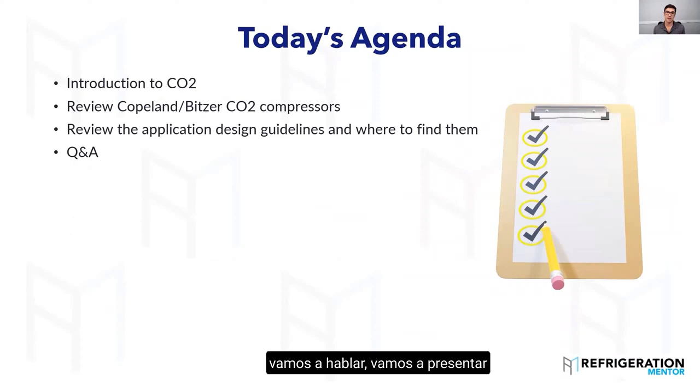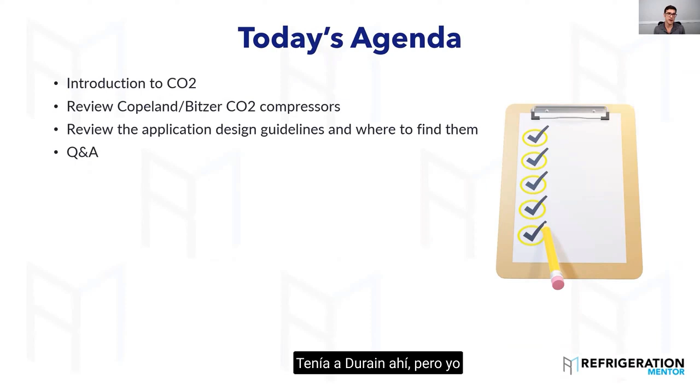Today's agenda: we're going to introduce CO2, talk about some key features of it, and then get into reviewing some Copeland and Bitzer CO2 compressors. I did have Dorin on there, but I don't know if we'll have enough time. If we do, we'll get into a little bit of those.

Have many of you worked on CO2? Just by a show of hands, or shoot it in the chat.

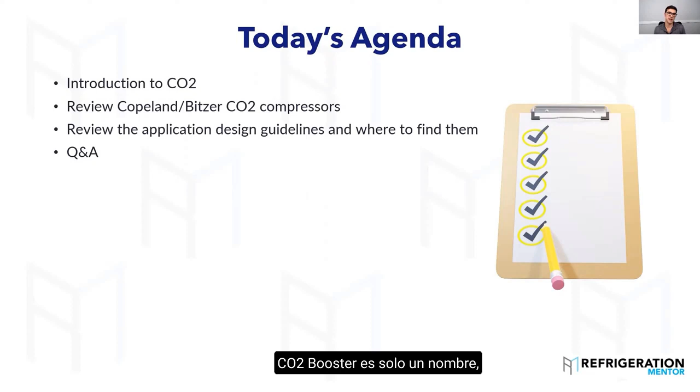I see a question here already. Toyin asks, what's the difference between CO2 booster and CO2 with ejectors? So CO2 booster is just a standard system, you wouldn't have ejectors or parallel compression. We won't dive into that today, but it is a difference. CO2 booster is just a name meaning transcritical system. But if you have a basic system, you wouldn't have ejectors, or parallel compression, or adiabatic cooling.

Okay, great, Paul. Yes, so Pat has, Jared has. Dean, a little bit about this, thanks for the question.

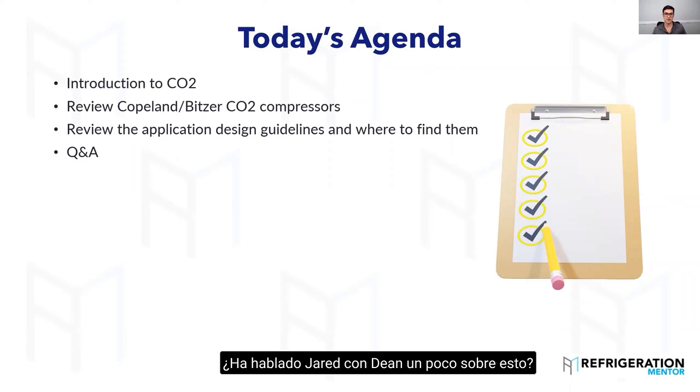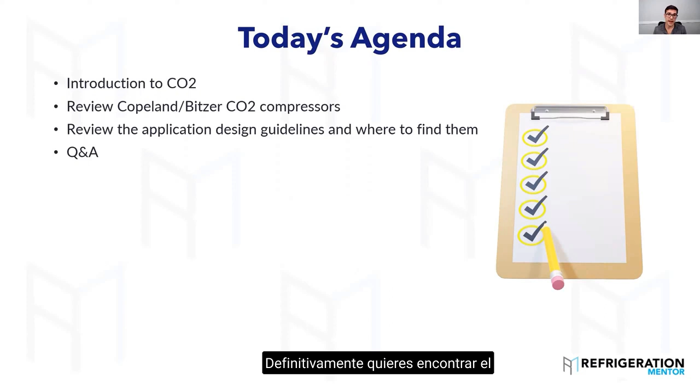So then we're going to review some of the application designs. And what I mean by that is I'm going to show you where to find the information quickly, because I think that's the most important thing. In my years working at a manufacturer, I really honed my skills in finding the answer quickly. As technicians in the field, that's what you want to do, find the answer as quick as possible. When you can do that, it helps you build confidence in what you're doing and find the answer quicker so you can resolve that problem for your customers.

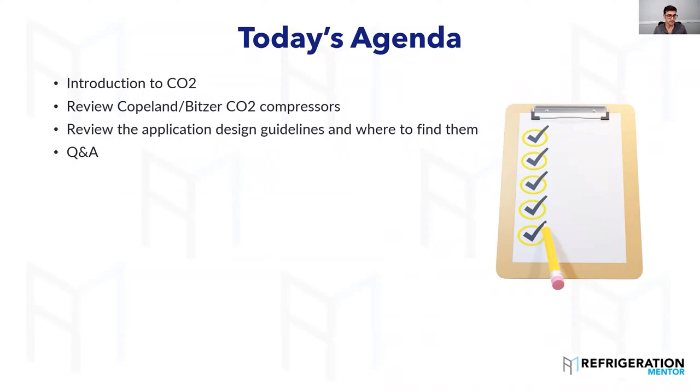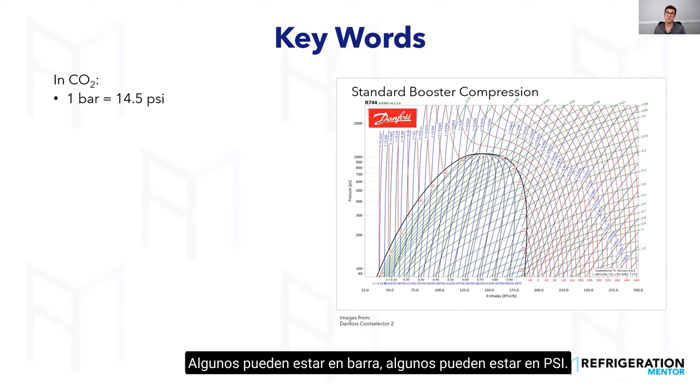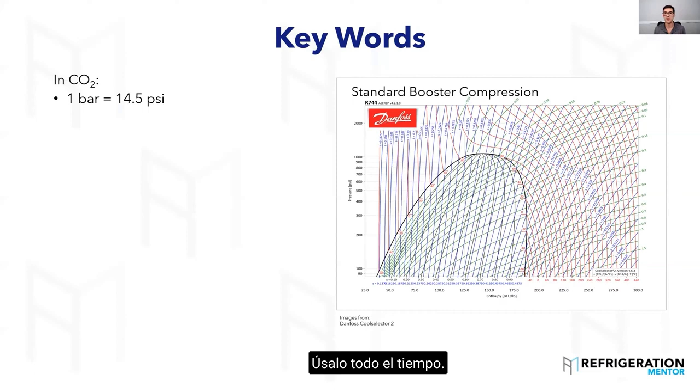So CO2, some key facts: 1 bar equals 14.5 psi. With CO2, you're going to start seeing, here in North America we talk in refrigeration terms of Fahrenheit and PSI, because in Canada it's a little bit different. In Europe, in Australia, where I worked, you're talking bar and Celsius. So you need to understand conversions, doesn't matter where you're at in the world, because now you're getting equipment from everywhere. Some may be in bar, some may be in PSI. You just really want to understand that. I highly recommend downloading an app on your phone that is a converter, for temperature and pressure conversion. I use it all the time. I'm getting a little bit better, but you need to understand conversions.

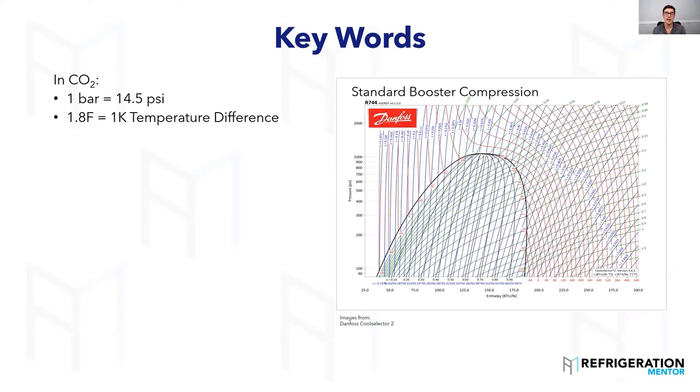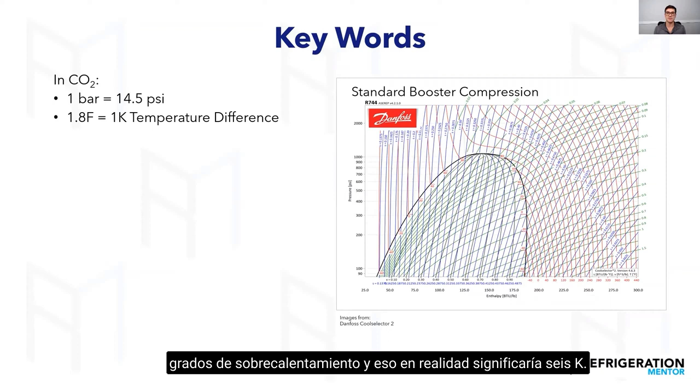Next thing, temperature difference, you're going to see a lot, especially in CO2. We talk for superheat, for example, or subcooling, here in North America we'll say 10 degrees superheat, and that would actually mean 6K. So that's the temperature difference when you're talking Kelvin. We use Fahrenheit, just once again understanding these conversions because you're going to see them in CO2.

Okay, critical point. What's the critical point? Does anyone know? You can unmute yourself and tell me, or put it in the chat. Isn't it just above 1,000?

Yeah, close. There is a critical temperature and a critical pressure. Does anyone know where it is on this graph? Thank you, Jared. At the top of the curve, isn't it the point where it doesn't change state anymore? Exactly, right here - this is the critical point.

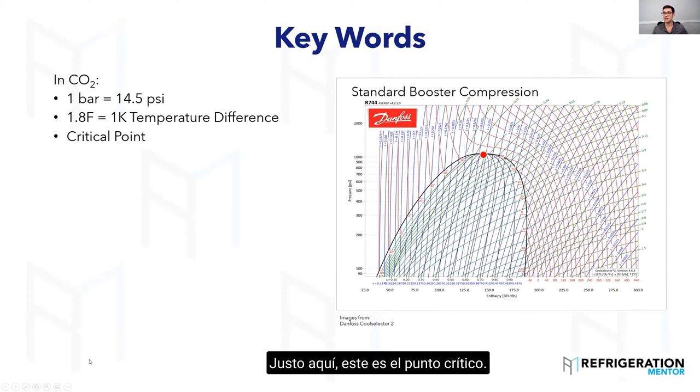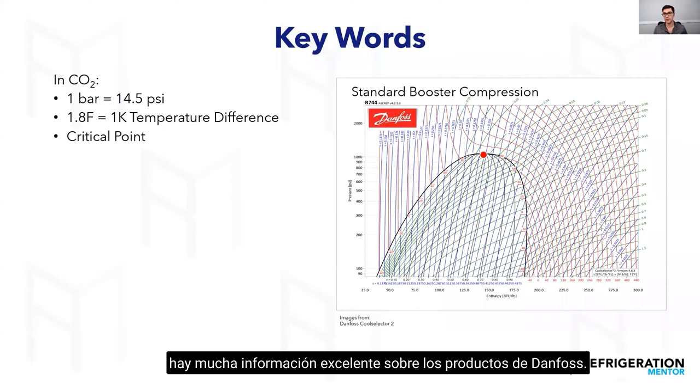So on this right hand, this is from Danfoss Coolselector 2. If you don't have this software, I highly recommend downloading it. It takes a little bit to learn, but there's so much great information in there on Danfoss products. Right at the top of the curve, that's the critical point. Every refrigerant has a critical point.

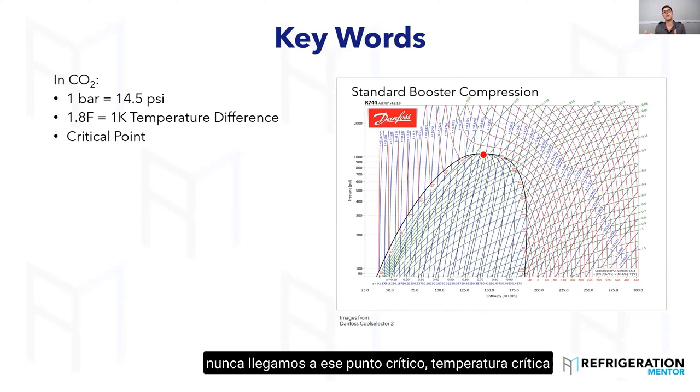We just don't see it with HFCs or HFOs or CFCs back in the day, because we never got to that critical point - critical temperature or critical pressure - because it was so high. But now with CO2, it has a really low critical point, and you'll see it at 87.8 Fahrenheit or 31 degrees Celsius.

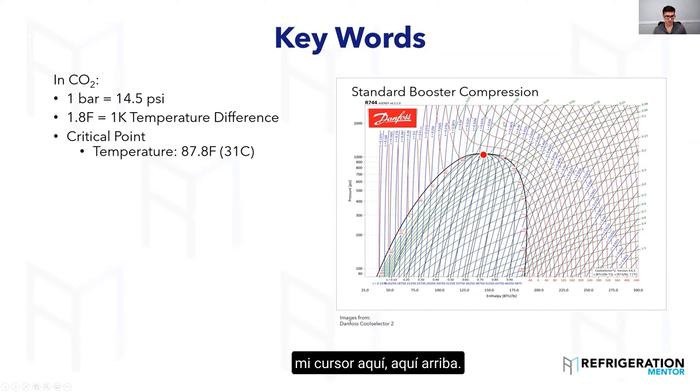So when you're above that, you're in what we call our transcritical or supercritical zone. And that would be, if you can see my cursor right here, right up here. So when you're up here, that means you're in transcritical mode or you're in that supercritical fluid zone. So it's not really a liquid, it's not a vapor, it's like a fluid.

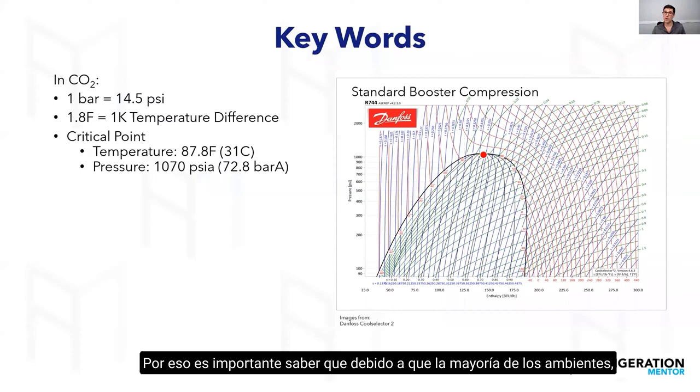I've seen it many, many times. One of the trainers I used to work at, you could put it into transcritical and you could see that phase - you can change it from liquid to vapor to that transcritical. So it's important to know that because most ambients, most climates will get above that.

Because CO2 was mainly in the regions where it's cooler out - like Canada was a great spot, anywhere north of the equator. When you start getting closer to the equator, it gets a lot warmer, so it was a lot harder to have CO2. CO2 is not new - CO2 has been out for over 100 years in refrigeration.

But newer synthetic refrigerants were easy to use, lower pressure, and then we went through a cycle of having synthetic refrigerants. Now we're back in natural refrigerants. You're going to start seeing them heavy. Regulations are pushing CO2 or natural refrigerants.

You're going to see more CO2, more propane, low GWP refrigerants - which I mean by that is global warming potential refrigerants, like A2Ls, which are mildly flammable refrigerants. If you have not seen them already, you're going to start.

But there's going to be a massive influx of CO2 equipment in the next 10 years. There's already a lot, especially here in North America and around the world, you're going to see a lot more. Japan has tens of thousands of CO2 units, like heat pumps, water heaters, for example. There's over 30,000, I believe probably over 30,000 supermarkets.

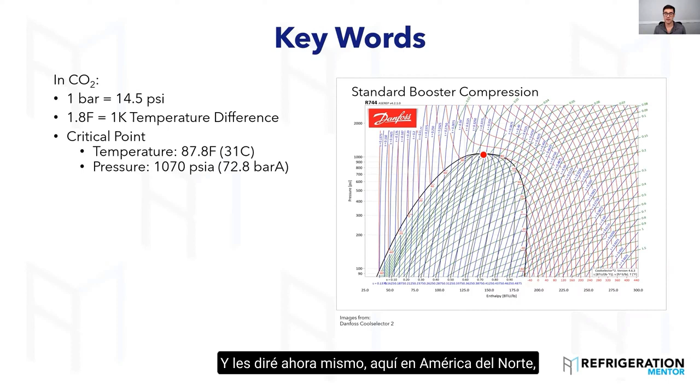But it's good to understand where it's going. And I'll tell you right now, here in North America, at some point, it's going to be all supermarkets going to natural refrigerant. In Quebec, one province here in Canada, it's anything over 50 kilowatts, which is 67 horsepower, which is not a big rack, needs to be below 150 GWP, and that's pretty much CO2.

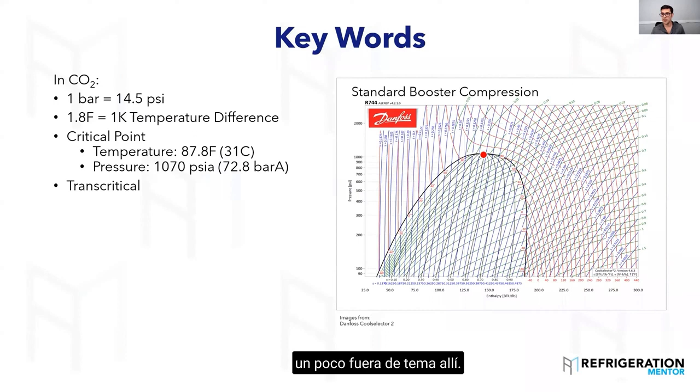California's got a lot of regulations - they got an alliance there, so you need to understand this. A little bit off topic there. So transcritical is anywhere above that critical point - we talked about that critical point. So anything above here, when we get up here, is the transcritical zone.

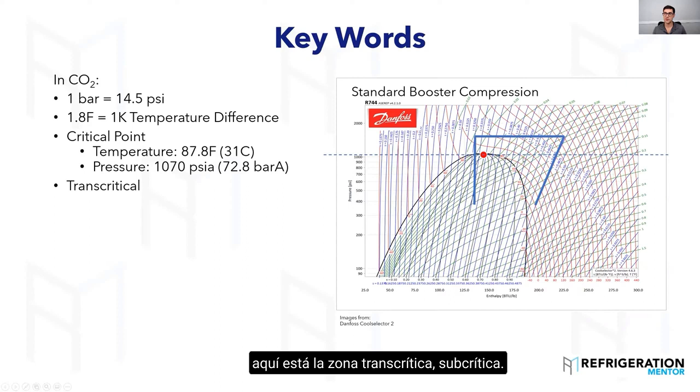Subcritical - that's where all our refrigeration equipment works now. So if you work on 404, 448, 449, 134A, we're always running in the subcritical zone because that critical point's so high. It's really important when you talk about a booster system - you're going to have the medium temp, which will go into transcritical, and then you have your low temp, which is going to stay in subcritical - so that's your freezers. Any questions so far?

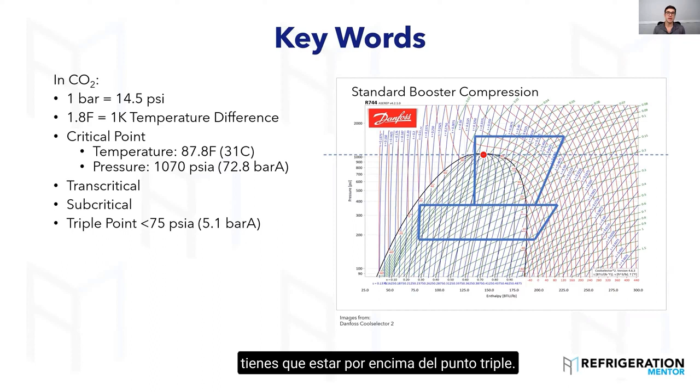Okay, triple point. The triple point is something very important to know, because when you're charging any CO2 system, you need to be above the triple point. If you try to charge a system below the triple point, what could happen? Anyone? Dry ice. Dry ice, exactly.

I've tried, to be honest, on demos and trainers. I pulled things into a vacuum and blasted liquid in there, but I don't think I did it right. Maybe because it was 1/4 inch lines and it was flashing. I couldn't cause dry ice, but I've seen times when I was pumping down a circuit and wanted to make dry ice, and I pulled off. You've got to be safe with CO2, wear gloves, glasses, be very safe.

I pulled it off while I knew there was still liquid to make dry ice, but I had to try to do that. I know it does happen, but I've talked with hundreds of contractors who've been working on systems, and they haven't come across making dry ice, even though I've seen it and heard about it. Taking the liquid dryer shell apart, you can usually make it pretty quick. I've seen it done there many times when you're changing the filters.

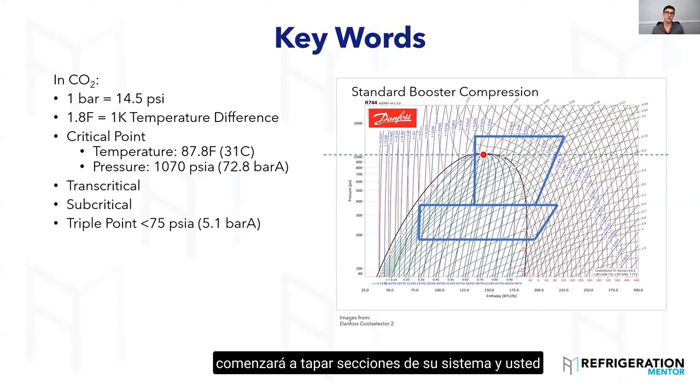So you need to be aware of that, because when you're pumping down a system and changing that core, you're making that really cold. And if you get dry ice in there, it sublimates, so it's going to take a while. The best thing is to probably close it up, raise the pressure, turn it to liquid, and get rid of it. But you're going to want to clean that out, and then pull a good vacuum after that. You don't want dry ice in your system, because it'll start plugging up sections of your system. You can run into major issues, especially if you cause some dry ice, and then think the coil's evacuated, and run into non-condensables in your system.

So here's the triple point region. It's good to understand where that's at. You just don't want to get into a dry ice situation. If you've ever seen dry ice before, it's just a little block, really cold, minus 109 Fahrenheit, I believe. And when you get that in the system, you're going to run into a world of hurt.

Trapped liquid. This is really bad. You do not want to do this. At 68 degrees or 20 degrees Celsius, you're looking at like 868 PSI pressure in a cylinder. If you all of a sudden bring that temperature up by 1 degree Celsius, 1.8 Fahrenheit, it expands by 10 times. So you're going to see a massive amount of pressure increase.

That's why you never want to trap CO2. You'll see along a lot of ball valves and stuff, there'll be check valves around them to make sure you don't trap CO2, because it is dangerous when you do that. Any questions so far?

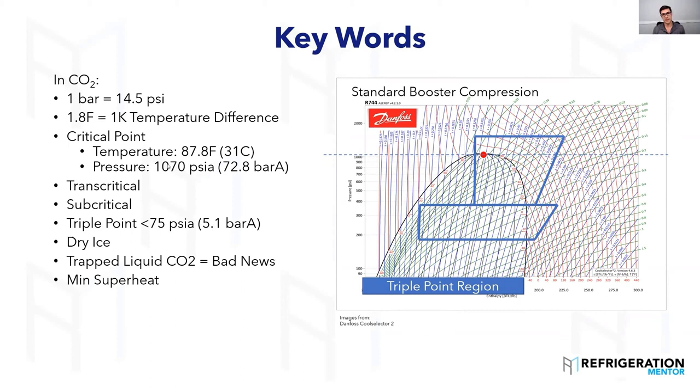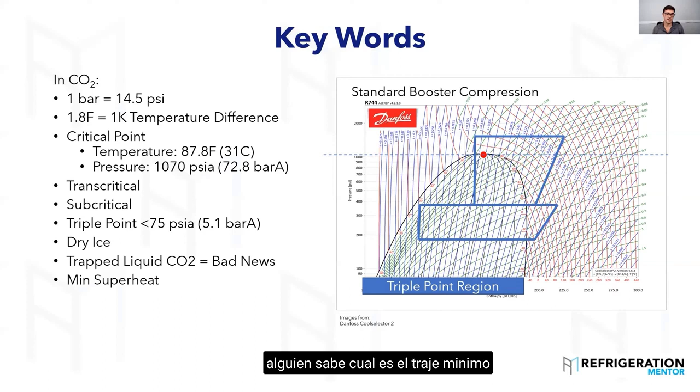No? Okay, so minimum superheats. Now this is something that's super important. When I was working at Copeland, I used to do a lot of field support and take a lot of calls. There was one call I got after, I believe, 14 compressor replacements. They just kept sending more compressors. This was back in 2015, I think. 14 compressor replacements on a rack because of superheat. Does anyone know what the minimum superheat for medium temp would be?

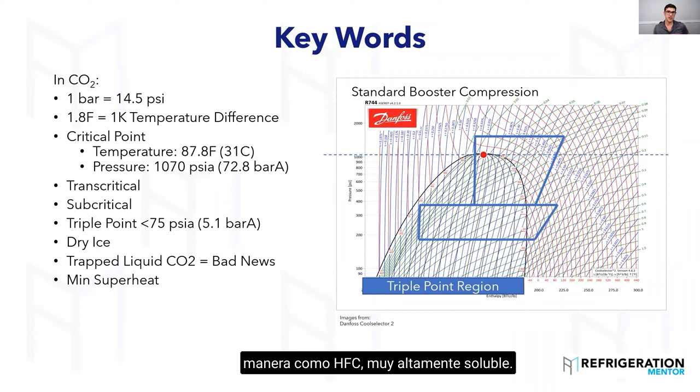35 degrees. Yeah, 35, 36 degrees, or 20K. You need to stay above that, because CO2 doesn't carry with the POE oil the same way as HFC - it's very highly soluble. So what will happen when you start getting below that? Sorry, medium temp we were talking about, we said 36. No, it's not 36 for medium temp, that's low temp. Medium temp is 18, 10K. Low temp's 36. So that was my mistake.

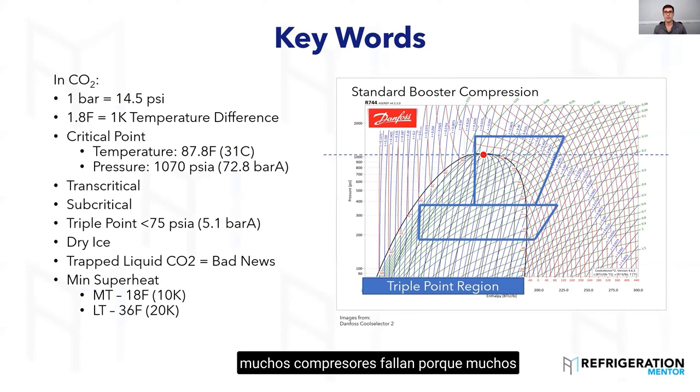But CO2 is very highly soluble in the oil. So what will happen is that if it has flinger feed, as it's going through cranking or feeding the bearings, it'll start to wash them out. It'll start to dilute the oil when you start getting below that and start to cause issues. And this is where I've seen many compressors fail, because a lot of people do not check compressor superheat.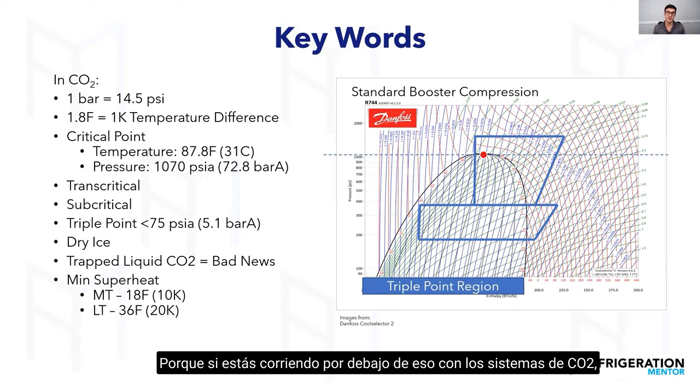You should really be checking the compressor superheat on any system. Some people call it total superheat, some call it system superheat. So you have your evaporator superheat, and then you have your compressor superheat. It's so important to check that on any system at all. Always check that, because if you're running below that with CO2 systems, you're going to wear those bearings out and cause a failure. Most of the compressor failures I've seen with CO2 were due to liquid washing the bearings and washing the oil out.

Anyone have experience with that in the field? Have you replaced any compressors because of superheat that failed?

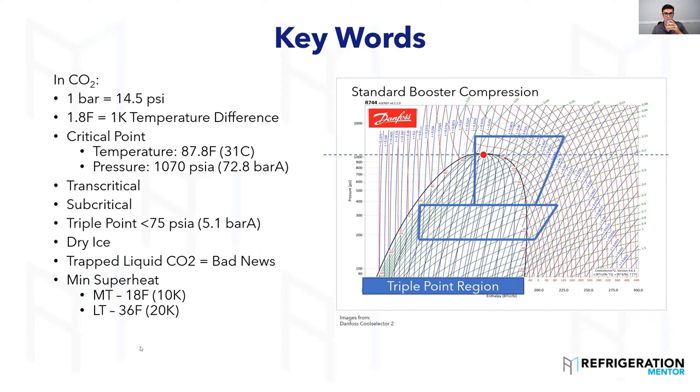So let's talk about some bits on transcritical compressors. There's lots of great information out there, and you'll see in the top corner I got an image from Bitzer software. If you don't have the Bitzer software or BEST on your phone, you need to download it if you work on Bitzer compressors.

The information I'm going to talk about right now is out of the KB130. I'm going to show you how to maneuver that, and I'm going to go through this section. I think it's highly important for you to understand where to find the information from the manufacturer.

There's a lot of CO2 compressor manufacturers, and I'm talking a lot. But the main ones I've seen here in Canada for commercial would be Bitzer, Copeland. There's the odd Dorin, and I don't see much more than that. If you've seen any different, let me know. Throw in the chat the other CO2 compressors you work on, because I know Panasonic makes some, Bock makes some. There's a ton of CO2 compressor manufacturers out there, but here in Canada, North America, we see mostly Bitzer and Copeland.

Okay, so this information is out of the KB130. There's two different types of oils they recommend: the BSG 68 for cascade systems. What a cascade system is, you'll have one refrigerant on top, we'll say R448 on the top, or ammonia, or whatever it's on the top, propane, and then on the subcritical side would be your CO2. The other one's a booster system, where you're doing CO2 on the transcritical side, the medium temp, and you have the low temp CO2.

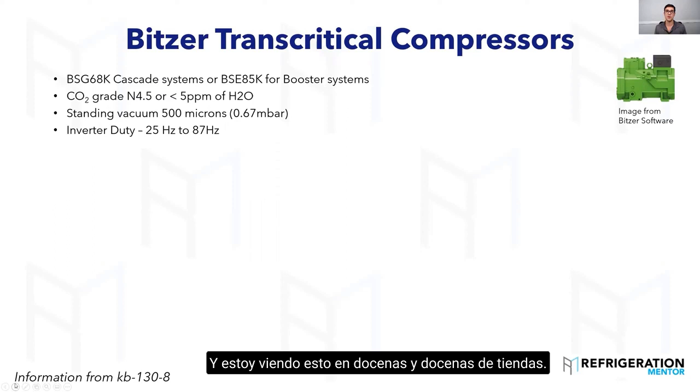They do a retrofit, put a variable speed drive on a compressor, and then 6 months later it's just bypassed because the technicians don't know how to work on it. Whatever you're working on, if it's CO2, if it's an inverter, VFD, you got to learn that stuff. I know it's outside the comfort zone, you don't have time, you got to do it in the evening, you got to do it just like this.

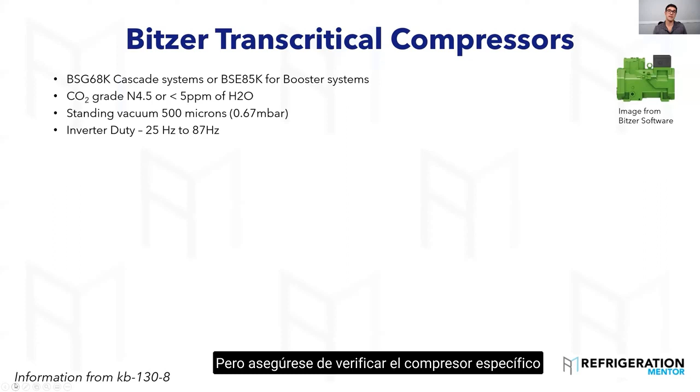Understand how the equipment you're working on works. It's going to make you such a better technician. You're going to have more confidence, you're going to be more confident in your work. But make sure you check the specific compressor you're working on, especially for Bitzer, because they have different inverter duty ranges.

Charging procedures - Bitzer wants you to turn on that oil heater first. Copeland does as well, most all manufacturers will say this. They want you to heat up that oil so there's no migration. What migration is, that's refrigerant going to travel to the coldest part of the system. If that compressor is the coldest part, it's going to travel there. Refrigerant's also chemically attracted to oil, so it's always going to want to go to the compressor.

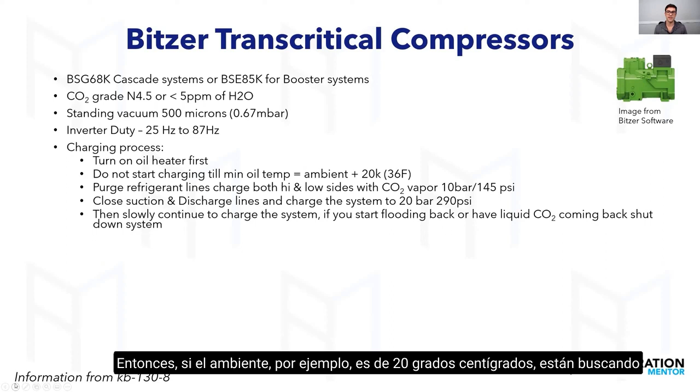So they want you to turn on the oil heater. Do not start charging until the minimum oil temp is equal to ambient plus 20K, or 36 Fahrenheit. So if the ambient, for example, is 20 Celsius, they're looking at 40 Celsius oil temp, or plus 36 on top there. So if it's 60 out, it should be 96 oil temp. I haven't seen this - this is not in the Copeland guides, but this is a good way to check.

Purge refrigerant lines through high and low side. No different than your standard refrigerant, getting that CO2 vapor and purging those lines so you're not getting anything into the compressor.

Close suction and discharge lines to the system. I've seen this here when you're evacuating, when you're pressure testing the system, they want you to close off that compressor, which totally makes sense. If you're pressure testing that system and you leave that compressor open, this should be a standard anyway, but you should shut those suction and discharge valves, so you're not getting anything inside that compressor, because you could get moisture, you could get air inside there. You don't want that. And slowly continue.

So what you need to do is charge the system with vapor. So when you evacuate it, you get it down and you start to charge, you need to charge with vapor first, because we talked about it earlier, dry ice. Dry ice is anything below that triple point, which is 75 PSIA.

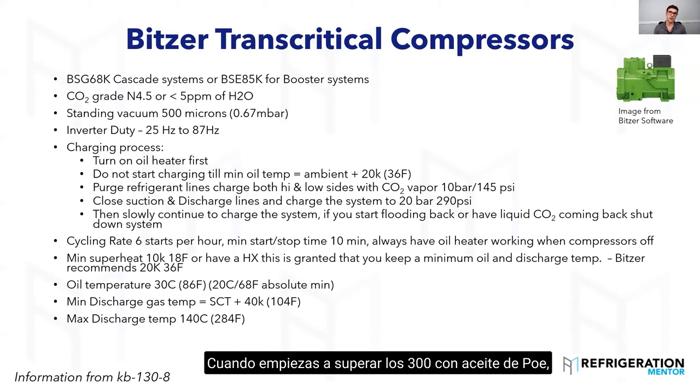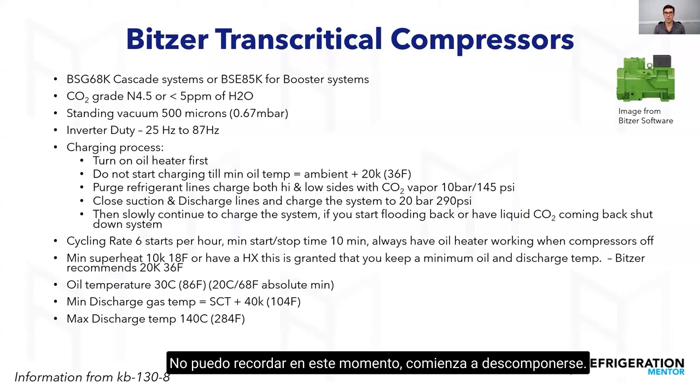Maximum discharge temperature, 140C, 284F. So this is a little bit different than Copeland, which we'll go through, but it's something you need to be aware of. When you start getting above 300 with POE oil, it starts to lose its lubrication properties. When you get up to 350, I think 330, 350, I can't remember right now, it starts to break down. And I've seen this before. When you start running that hot in your system, your oil separators - you have to remember, your oil separators only pull oil out of the refrigerant at certain temperatures.

When it's running too hot, the viscosity of oil isn't right, and it's not even going to be pulling oil properly. So you're going to start having oil issues on the system. Just be aware of the temperature of running, and verify with the oil separator what the max temperature should be running at.

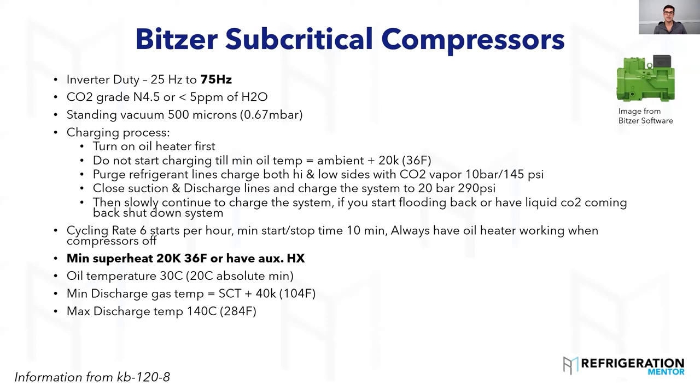So Copeland CO2 semi-hermetics. Once again, the image I have up there is from a software called Copeland Select 8 software. This is a European software, so if you're in Europe or any parts of the world besides North America, I highly recommend using that software, it's great. Here in Canada and the US we use a product selection software, another good software where it'll talk about all the different parts. They're similar, but different because the European software will have different compressor models compared to North America. So just be aware of that.

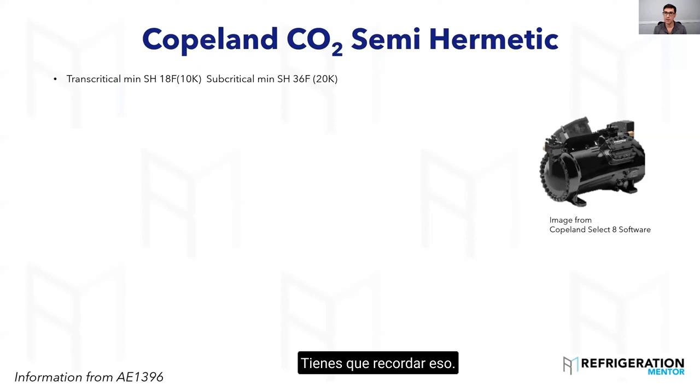So same thing, the semi-hermetic compressors, no different than Bitzer. That transcritical compressor, minimum superheat is 18F, 10K. Subcritical, that low temp is 36 Fahrenheit or 20K. You have to remember that, and you have to be checking that, because when you start getting below that, you're starting to cause damage to the compressor.

So the semi-hermetic, you want to keep the discharge below 250, 121C. We saw Bitzer said 284, I believe it was 140C. You want to make sure you're keeping it below that, because when you get higher it causes more wear, more heat, and more damage. The protector on this one will trip off at 310. There's an internal probe there, so you can check that, use your meter and check the sensors. Bitzer has the same thing, they have internal PTC sensors inside the compressor, so when your temperature gets too high, it'll stop the compressor to protect it.

So there's lots of warnings. Once again, you have to be safe with any refrigerant you're working with. There's a lot of safety stuff I didn't go through in the Bitzer one as well as in the Copeland one here, you need to read that stuff. I know I've been in the field, I definitely got complacent before, skip pages, but the safety info has so many little tips and tricks that you need to understand, and I highly recommend it. This is an example, if your pressure gets above 1722, shut down that compressor. This is something you can program inside the controller, and the ones I've worked on, that's what they program a lot of stuff for, including high pressure relief on the compressor. You can see it right over here, maybe.

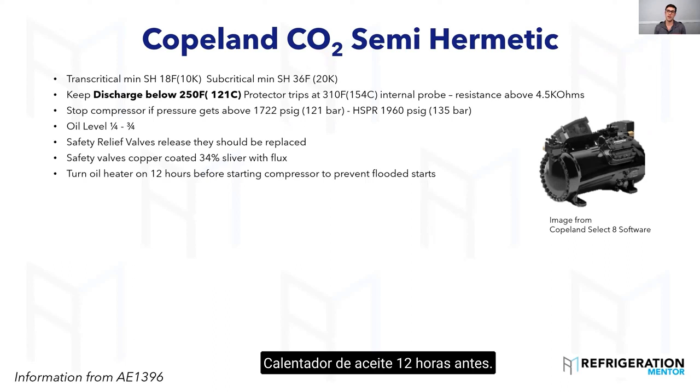Turn on oil heater 12 hours before. This is to prevent flooded start, similar to what Bitzer says. Always isolate the compressor when pressure testing to prevent air and moisture in oil. Same thing as the other compressor manufacturers. It's important, and over time when you're working and reading these guides, you're going to see a lot of similarities. There are going to be different uniqueness, like keep the discharge below 250 compared to a Bitzer, but you're going to see a lot of uniqueness.

You want to keep moisture out, you want to keep air out, you want to be running that oil heater before. Pressure test below 870, 60 bar. Always want to remove any component that doesn't meet that. For example, if you're doing the subcritical side, some of those components may only be up to 680 psi, or I think it's 45 bar - I'll have to double check that. But you want to make sure you pull those ones out if you're pressure testing higher than that.

Do not run below 73 psi or 5 bar, that's below your triple point. Charge of 145, 10 bar. Here's one of the little differences - this is Copeland grade 4. You saw in Bitzer it was 4.5 and 4.5, which was less than 5 parts per million. They say less than 10 parts per million in their guide.

Once again, doesn't matter what either one of them say, you need to make sure that refrigerant's going in dry. So if you have to use a filter, go before - recommend charging through a filter dryer. Both manufacturers do recommend that, keep that refrigerant dry. Here's another difference.

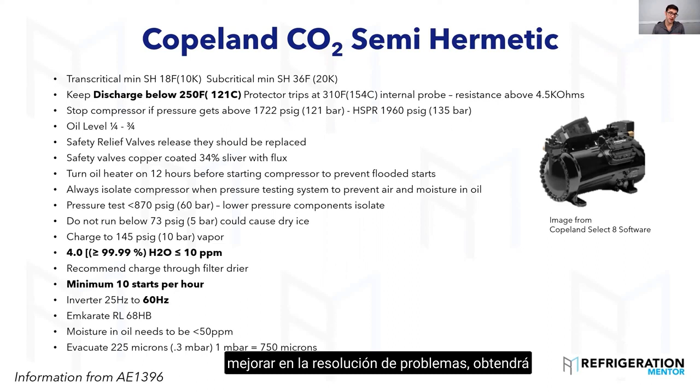Here was another difference - I didn't bold this one, but Copeland recommends evacuating down to 225 microns, 0.3 millibar. 1 millibar equals 750 microns, so that's even lower than what Bitzer says. But this is the stuff that you need to be learning. I know that you're servicing, you're in construction, working 12, 14-hour days - you got to find time to read these guides. When you're working on this equipment, you need to find these uniqueness, and you're going to get better at troubleshooting, better at service, better installing the equipment you're working on.

Any questions on that one? The transcritical semi-hermetic for our Copeland. Any questions so far? I don't see anything in the chat.

Yeah, I just had a quick question, Trevor. I just wondered why you have to have the minimum 10 starts per hour. Oh, that should be maximum. Oh okay, yeah, that makes more sense then. Yeah, it shouldn't be minimum, I'm sorry, that should be maximum - so you don't want more than 10 starts per hour. So thank you for bringing that up.

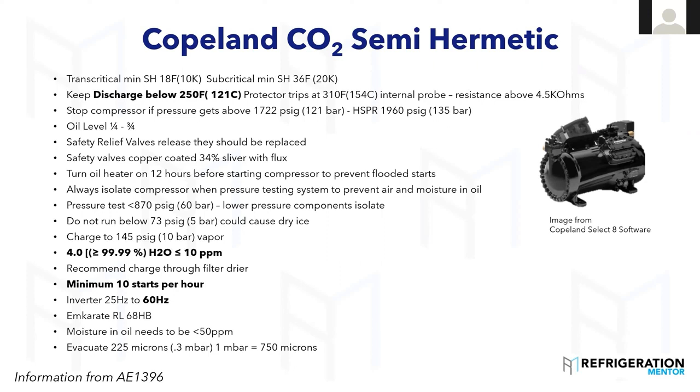So you don't want to go more than 10 starts per hour. That's like running it for 3 minutes and off for 3 minutes, every 6 minutes. Okay, that's excellent. Thank you for pointing that out. I'll probably have it on the next one too for the scrolls here.

Once again, I didn't go through each one step by step like the first one, but minimum superheat 36F. How you check this: take your temperature probe, put it on the suction right close to the suction service valve, and take the pressure right from there. Take your pressure and temperature, take your temperature over that converted pressure, and you're going to get your compressor superheat, your total superheat, your system superheat. This is what you need to make sure you keep above 36 or 20K.

Maximum operating pressure on the ZO scrolls is 500 PSI. This is standstill pressure. Discharge 625. There's a mandatory safety relief of 500 PSI. This is UL rated for North America. They always need to be open to the system, so you can't have a valve where you close it off - it always has that port open. It's a two-way valve. One port's always open, and that's where that safety relief needs to be connected, or it always needs to be open to the system either way on that suction line.

Low pressure cutout on this one is 80 psi or 5.5 bar. High pressure cutout 43.1 bar. I don't know why I didn't put the psi in there.

Another thing I've seen many times doing a field audit, going out with contractors, is certain compressors need to have check valves added on parallel rack systems. What I mean by parallel rack system is multiple compressors tied in with a discharge line, a suction line, a header. On this one, on rack systems, a separate external check valve must be used. Inside the discharge there is a spring-loaded check valve, but it's not for this purpose, and they're not to 100% stop everything.

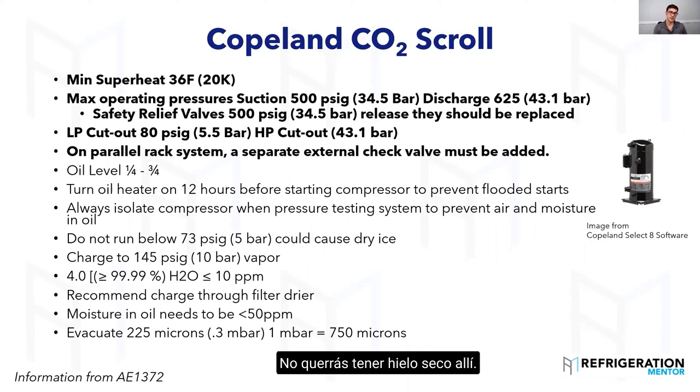Okay. Questions? No questions? Let's see if I can pull this up now.

Does everybody see my screen here? You see the Google? Yes. Okay, thank you. So, Bitzer software. Has anybody been to this before? Let's see a show of hands or yes in the chat.

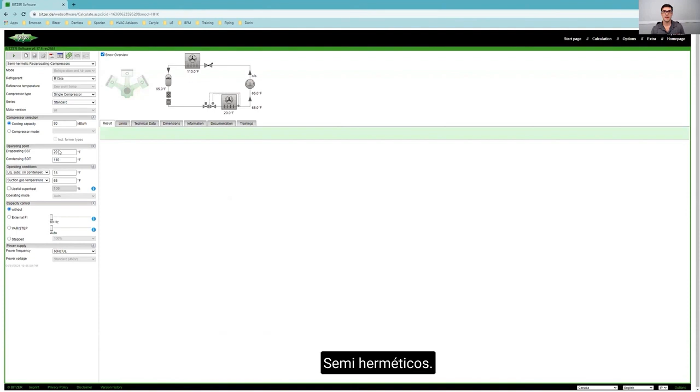This is where you get all the information for Bitzer compressors. We're going to show you some of the CO2 stuff, semi-hermetics. You want to go here, change the refrigerant. We're talking about CO2, click on CO2, and then subcritical or transcritical, whatever one you're looking for.

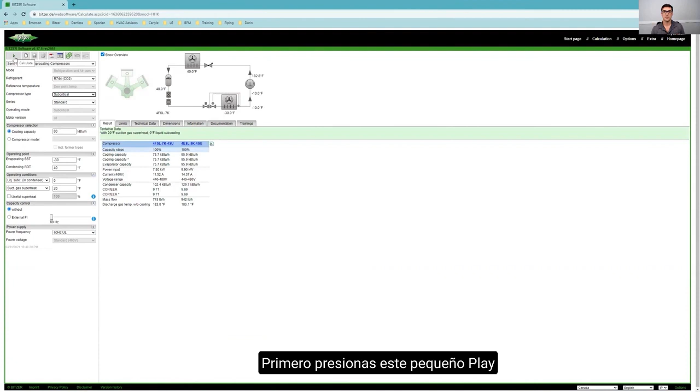You can put in all the information. What I want to do is go to the documentation. Oh, you got to press play up here first. You press this little play button and it opens everything up. Go to the documentation - it's going to show you capacity, the slide, technical, the limits.

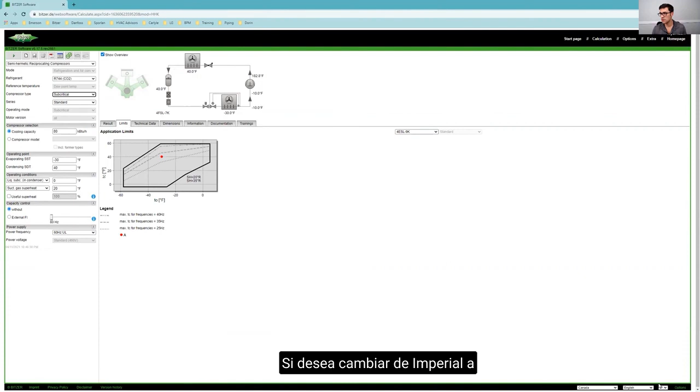Here's the operation envelope, for these conditions here. If you want to change from imperial to SI, right here, you go down to here and you can change it. So if everyone sees that - there's lots of people from all over the world on here - but this is the operation envelope. You always need to stay inside this operation envelope, no matter what compressor manufacturer you're dealing with, they'll have an operation envelope.

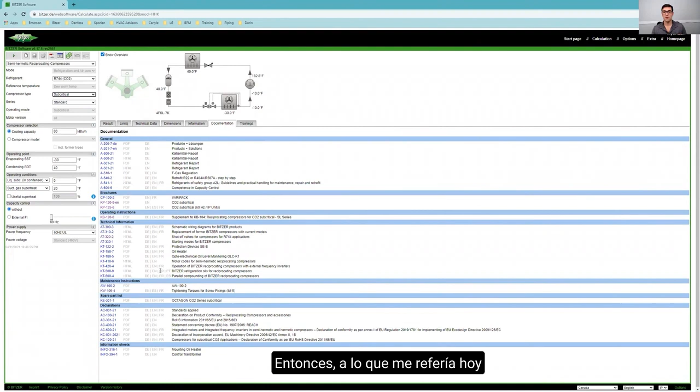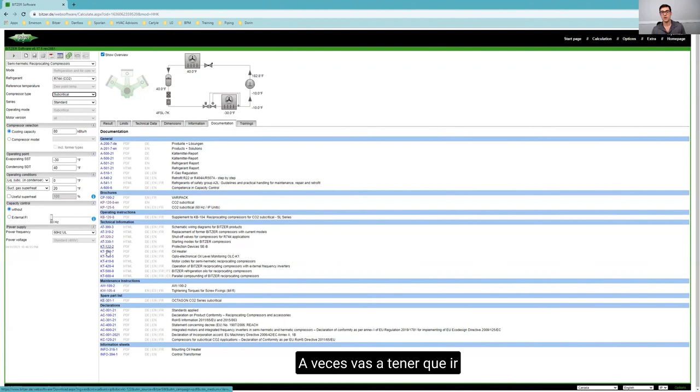Documentation right here. So what I was referring to today was out of this manual here. But you can see if you're working on Bitzer compressors, there's a ton of more manuals here. Look at this - oil heaters, reciprocating, all the stuff you need to know, like bolt torques, it's going to be in here. Sometimes you're going to have to go out - if you go into them, for example if I go into this one here, it's going to say other manuals you need to look up.

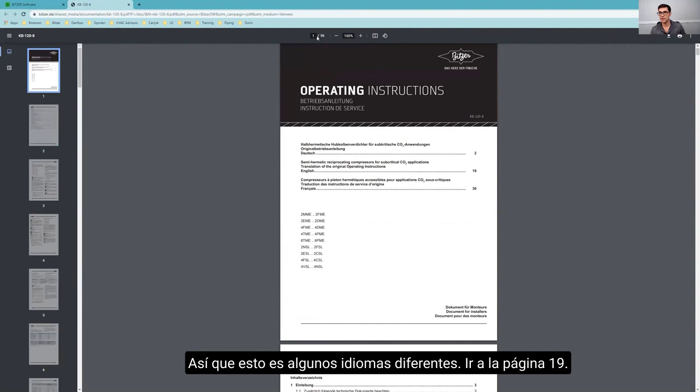So if I just go down here, this is a few different languages. Go to page 19 - I know that's where the English starts, since I only know English. But if you go in here, look, other documents, right here - that's what you want to look up.

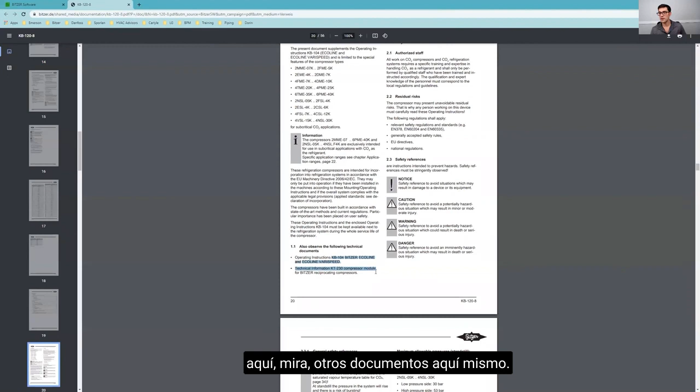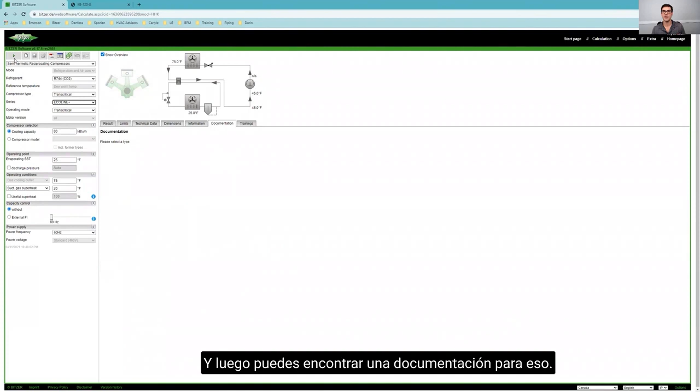To find these documents quickly, you can just go to Google, highlight it, put it in Google, and it'll come up and find it. It is in the Bitzer software, but you got to go into, when they have transcritical, I think. Yeah, you go into Ecoline here, and then you can find documentation for that one. So 104, I think this is the one I was talking about.

So you need to use this stuff as a technician. You know, to be honest, I didn't use it because I didn't know about this stuff.

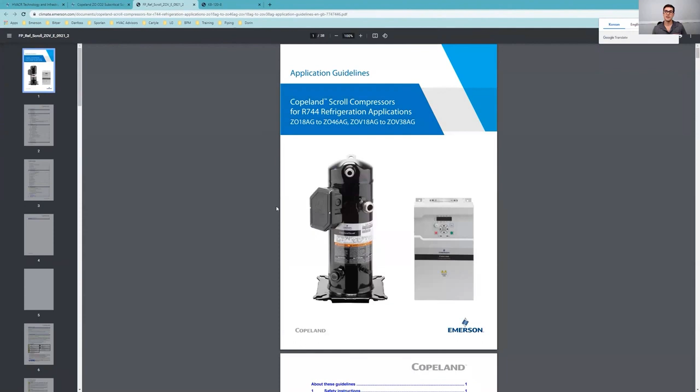Here's their new transcritical compressors. They don't have any technical documents on it right now, but we'll do the standard ZO. And then you go to documents - whatever compressor you want, manuals and guides. And here it is - this is talking about their new ZOV with their new drive and stuff. Here's so much good content.

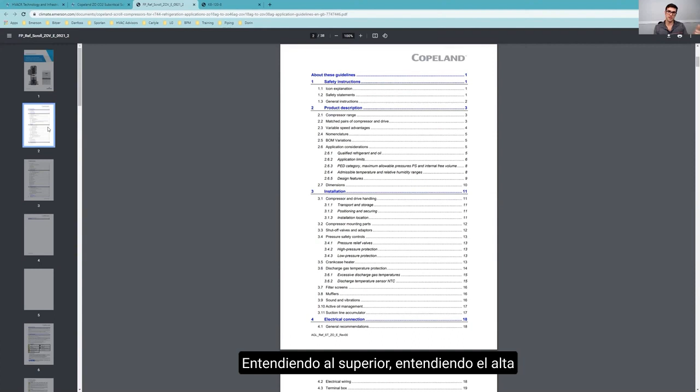Over time, after you read more and more of these, it's going to get easier, because you're going to see a lot of the similarities from the other manufacturers - understanding the superheat, understanding the discharge temperature, understanding the amps, understanding that operation envelope of the CO2 compressors.

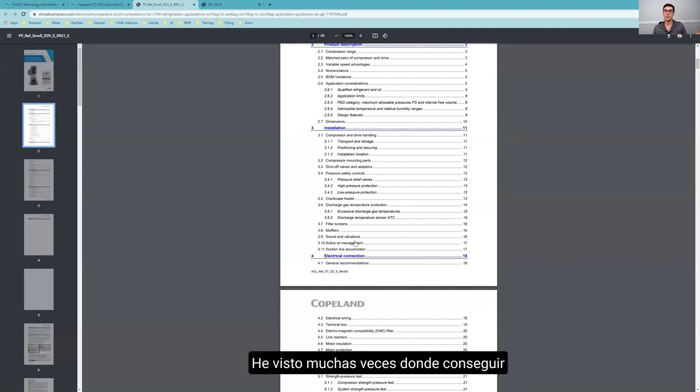As you can see, there's 38 pages of great information on how to install it - the safety, big things, the safety, electrical, crankcase heater, mufflers, sound vibration. I've seen this a lot - I've seen many times where you get cracked lines on racks or on compressors because they weren't mounted properly. So great place for resources here, a lot of good information.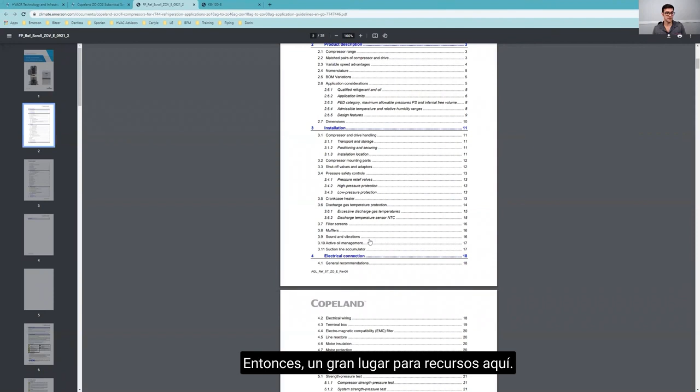Any questions on that so far?

Oh fantastic, keeping with me. Okay, some educational resources.

r744.com - when you want to learn lots about CO2, that's where you want to go. I talked about the group already, Atmosphere group, they have a Slack group. If you want to get involved with that, shoot me an email or message me on LinkedIn, and I'll get you the right connection to get connected with that, because it's a great place to learn, meet people within the natural refrigerant industry. I'm meeting so many different OEMs through there, getting connected, networking with people who are doing this.

You want to become better at what you do - find someone who's already done it and knows what they're doing, and get advice from them. Find a coach, find a mentor. Other resources for you: HVAC School, HVAC Know It All, HVAC Air School, and The Tool Shed. All these have so much great content - not directly for CO2 refrigeration, but definitely for learning refrigeration and HVAC.

Can screws be used with transcritical CO2? Okay, I believe so, I believe you can use them. Vilter's been working on a project with their HPLD when I was working for Emerson, and they've been in tests for many years, so I'm pretty sure screw compressors can work with transcritical. You need to find out - you got to work with the manufacturer, reach out to that manufacturer. But I know they were working on the high pressure, low displacement compressor.